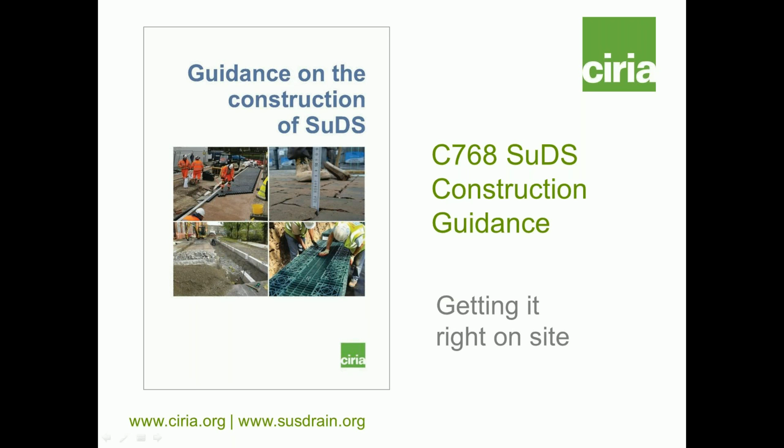Afternoon, everyone. Sue here. What we're going to do is to run through the rationale for the guidance and its general contents, and then focus on some of the key issues that arose as we were developing the guidance, just to emphasise some of the more important areas, in the hope that you'll get a broad understanding of what the document contains, and then be able to dip into it as you need to actually find what you want in any circumstance.

Or indeed to just give guidance to how the construction side of a project may need to be run. So really just to say in the first instance that what we're seeing now is that SuDS really are happening everywhere. Recent research has shown that an element of SuDS is actually occurring in about 80% of all planning applications. So we are really seeing an awful lot of it. And of course, there's an awful lot of extensions, redevelopment and retrofitting happening as well. So this is very much of the moment.

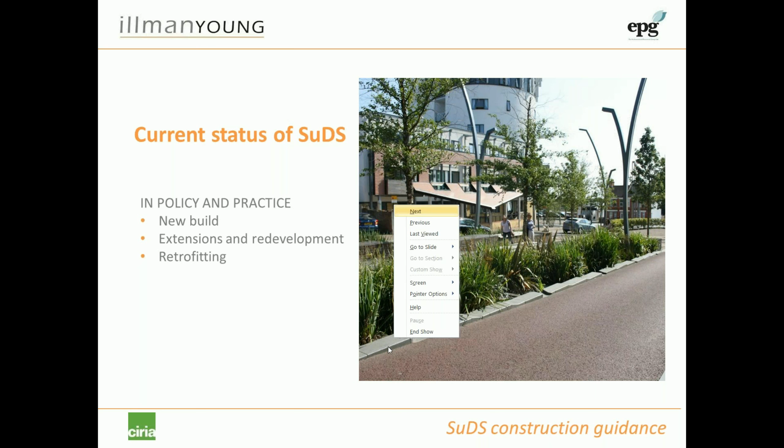Just sorting out our technology here. Okay.

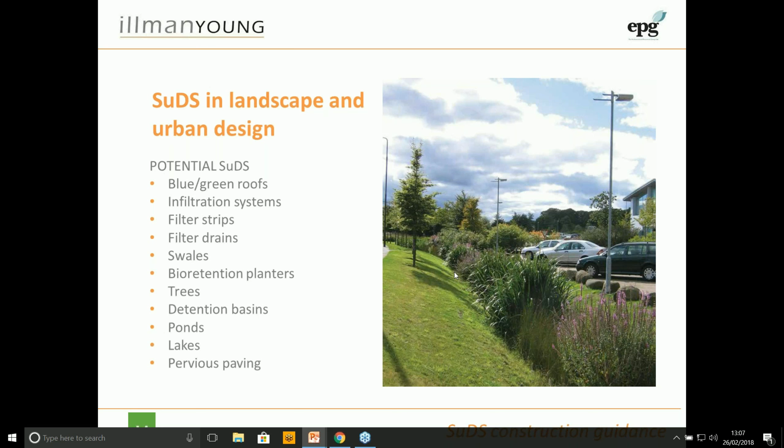So really just to say that the potential for SuDS is everywhere. Hopefully you've all seen the SuDS manual and understand the scope of the components that you can use. These ones are the ones that we're going to use most commonly within landscape and urban design. But of course, there's also the hard SuDS as well, with the rainwater harvesting and the various below ground systems that we need. So the comprehensive range of SuDS is really what's addressed in the construction guidance.

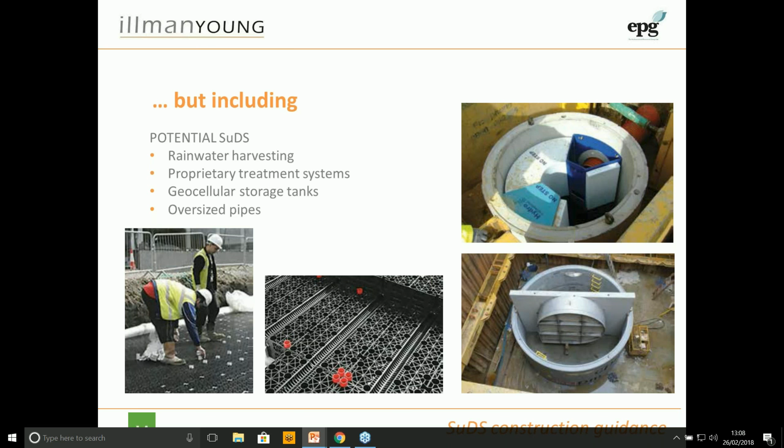And of course, they come in all shapes and sizes and the scale of what we're doing, that we need to be able to adapt how we design and how we construct to actually work for any size of scheme anywhere. And that generates, of necessity, some of the problems that arise in construction.

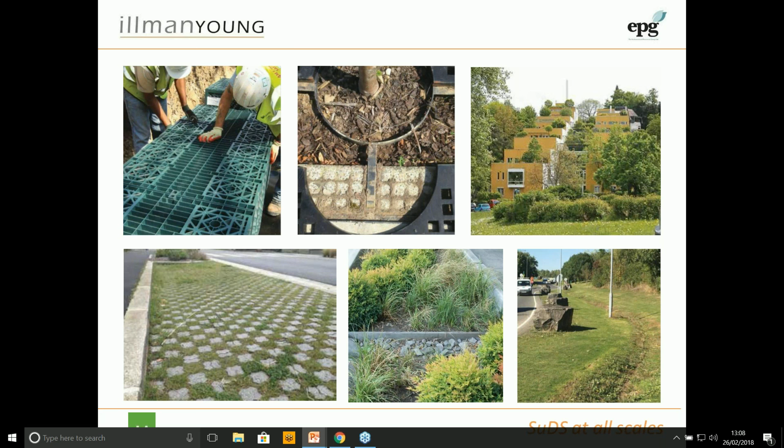So when we started this project, we really wanted to understand, by sending a questionnaire out to the industry, what were the problems that were generally arising in building SuDS, and therefore what did we need to write to actually help solve those problems. That message came back loud and clear in terms of where people saw the main problems lying.

And those were perhaps inevitably about level changes happening on site that had not been anticipated, the fact that when the concept scheme was designed, cut and fill across the site hadn't been properly addressed.

And particularly when looking at retrofitting, conflicts with services really arose on most projects. At the same time, there was a range of problems that commonly arose as well, such as inadequacies in the design drawings that hadn't addressed the whole of the design comprehensively, and existing site information that hadn't been recorded properly and should have informed the SuDS design process.

This gave circumstances that needed to be addressed during construction. Throughout the contract, additional hard surfaces may be required, needing additional design details to integrate them within the scheme, where changes of materials occurred that could impact how the scheme functioned, or changes on site, poor construction, or inadvertent changes where the impact on the SuDS scheme wasn't considered.

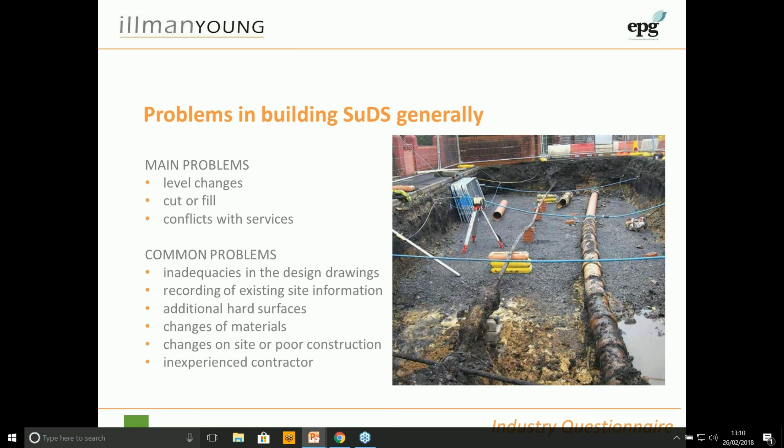Quite often these days, many more contractors are building SuDS, and all of them are inexperienced when they start, so there's a very steep learning curve for those contractors to really get to grips with the problems that could arise on site.

Other problems we asked about - it was interesting that conflicts with areas of ecological importance or with tree root protection zones didn't seem to be much of a problem. I think because generally people have to address those during construction on any site, so there was no particular concern over that when building SuDS.

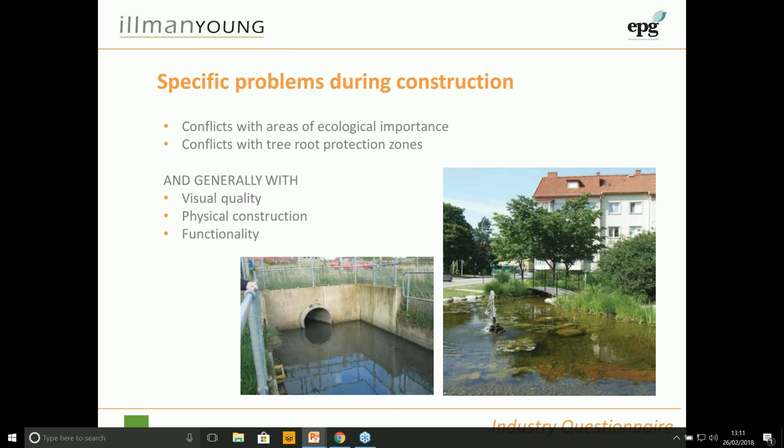But in summary, generally the issues that arose were very much around the visual quality, the physical construction, and the functionality of the scheme to make sure it would work properly on the ground.

Hi, it's Steve here now. So some of the other issues that arose were constructing SuDS on difficult sites, which is also picked up in the SuDS manual in terms of design for these conditions as well.

Issues that can cause construction problems on site are groundwater and the presence of SuDS in groundwater source protection areas, unstable fill materials, contaminated land and how you address construction in those conditions, constructing SuDS on steep slopes, and the converse of that, constructing SuDS on flat sites.

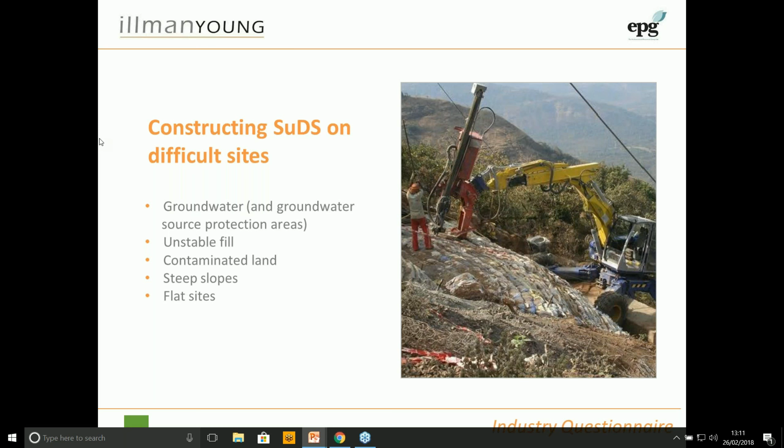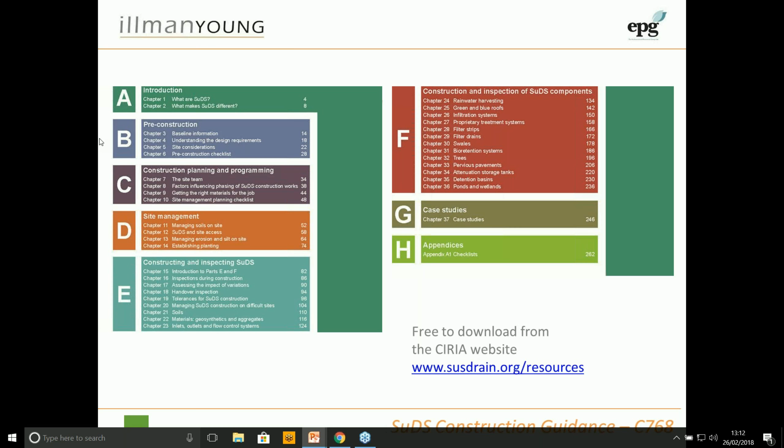So that brings us to the contents of the overall document. It looks fairly lengthy, but as you'll see if you've dipped into it, each of these chapters is really quite small, because when we were developing the system, the whole point was to make it very simple, very straightforward, and written in simple English that anybody could understand, and to make it as accessible to people as possible.

From that point of view, one of the things you'll find in every chapter is a thing called a jargon buster. That is to explain any technical language we really couldn't avoid using, and we've tried to make it an absolute minimum, so you can pick up the book, open it at any point, and hopefully understand what's written, because any jargon in that chapter will be fully explained to you in as simple a way as possible.

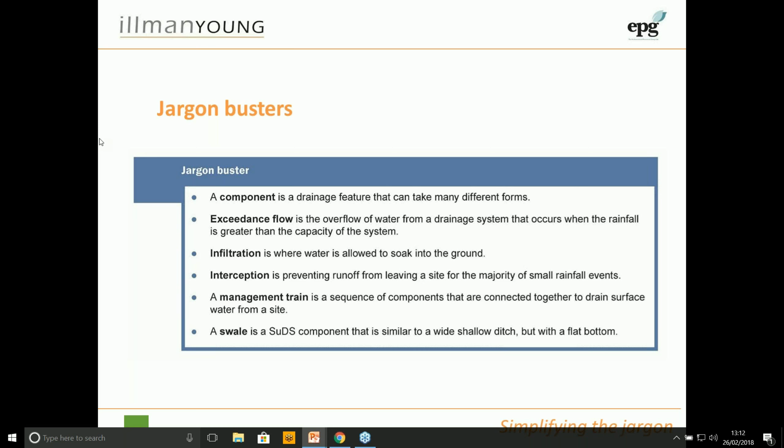We've also included, because this was compiled with a lot of help from industry as a whole, a series of things called handy hints, watch points and hold points. This is where people have shared their knowledge and experience with us in building SuDS, and we've tried to identify these things to assist you in your journey in learning how to do SuDS construction.

So a handy hint is something we've learnt along the way that is hopefully a helpful tip that may apply to your project and worth considering. A watch point is obviously something you just need to be aware of, because a problem could arise.

Watch out to see what the implications of it are and consider that in your project. And then hold points, perhaps a bit more of a stronger point here. This is something that you really need to wait for, to inspect the works and check before moving to the next stage. You can see the graphic approach we've taken to try and make it a little bit fun.

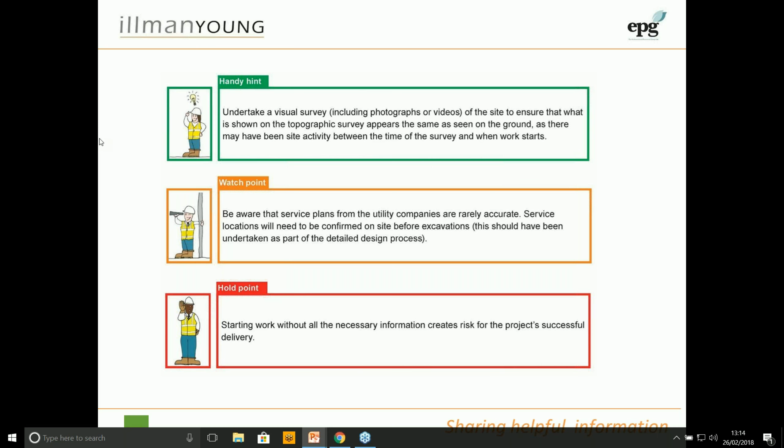But also to have a serious purpose of communicating the issues that can arise on site. As part of that, with the work that we did with the project steering group in developing the guidance, we actually took a lot of case studies from people.

These are two different sorts: mini case studies throughout the document, which deal with a very specific issue that happened on a particular site, and then at the end, major case studies - just 5 of those - that look at the scheme comprehensively and the issues that arose. The important thing with these case studies is to understand what the challenges were, what the outcome was, and what was learned.

I do like this one example. What you're looking at here is some granite setts that have been installed, where the contractor inadvertently misunderstood - this is his interpretation of an outfall, which was supposed to be a gabion filled with stone that would allow water to filter through. Clearly, as you can see, not much water would filter through that. So again, a very willing contractor doing his best, completely misunderstanding, and therefore the need to change that.

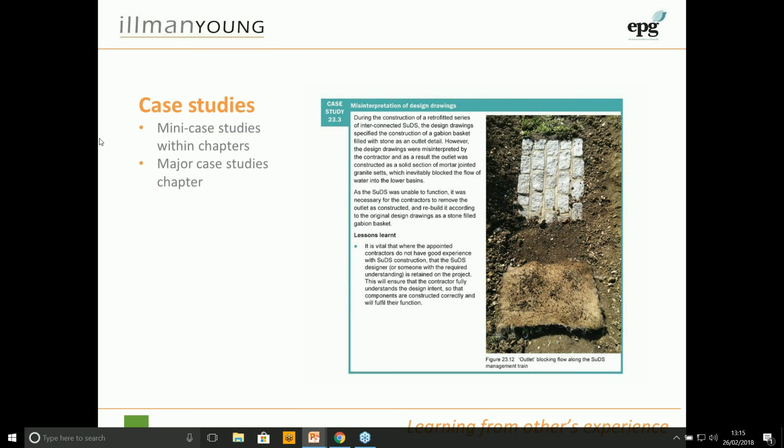This is perhaps not atypical of some of the problems that can arise on site. This is really just to point out that what we're doing here in construction is hopefully, in terms of working with the SuDS principles, trying to deliver some equality between quality, quantity, amenity and biodiversity.

But the point of SuDS construction is that if we don't construct it properly, we're going to cause ourselves many problems in actually trying to deliver those SuDS principles, because so much of what we're wanting to do is based around maintaining the soil structure, maintaining its infiltration capacity, and preventing damage to the site through compaction, erosion and pollution, and the silts or sediments that would arise during a construction contract. And the need to understand that there is such a difficulty in reinstating damaged soils, as well as the need to actually maintain existing vegetation and ecology.

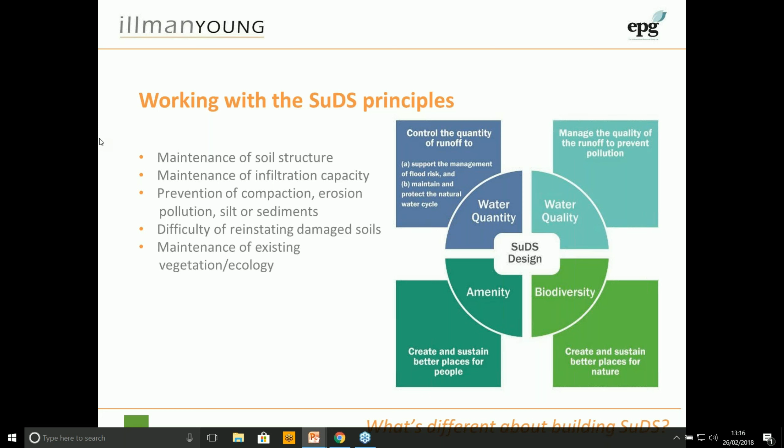Okay, so then really, what's different about building SuDS and how do we get it right? You'll notice in the document what we're talking about a lot of the time is how to get it right and to prevent things going wrong. This is really just a summary of how the document works.

So it's about being properly prepared before starting - that's both in terms of the site and the scheme. Planning the works to make sure you can get it right, planning to avoid the potential site problems that are likely to arise or frequently arise on site, and then how we manage the site and the works themselves during construction. Then at the end, we'll look at the typical challenges that arise for a few of the specific SuDS components.

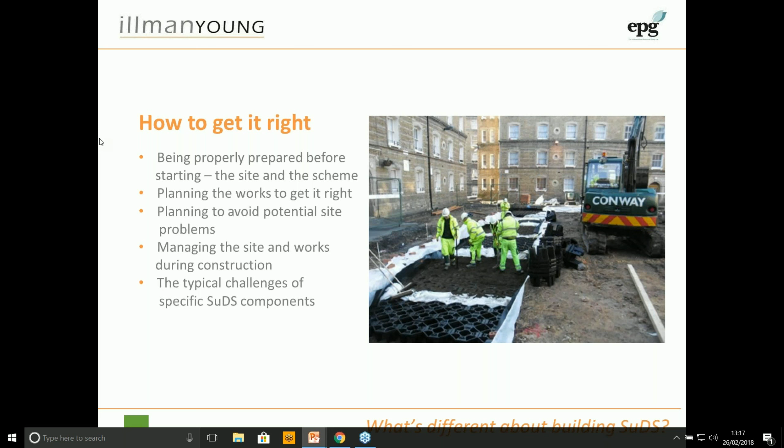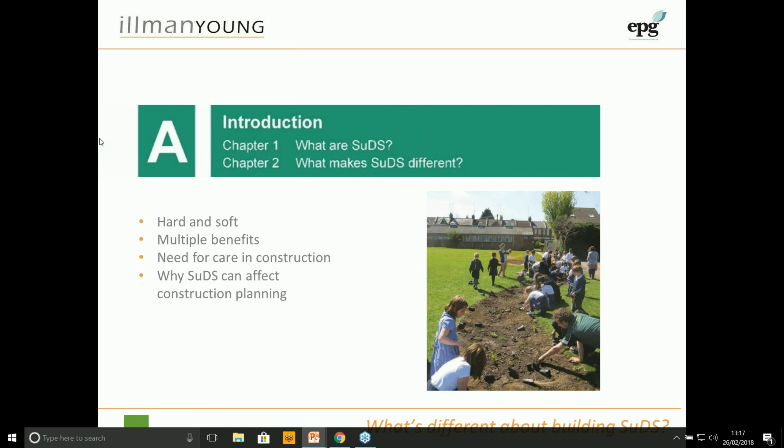Just starting with the first chapter, it's really just an introduction, talking about what are SuDS and what makes SuDS different, really stressing the difference between traditional systems and SuDS systems, and the need for care in construction, and why SuDS can actually affect the construction planning process.

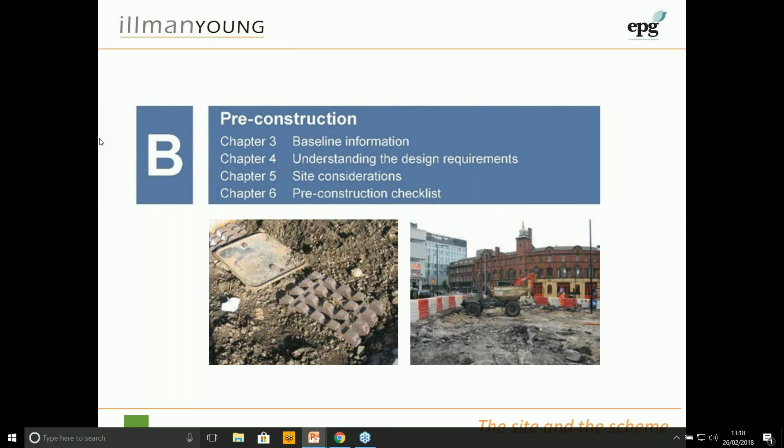In these initial sections, the pre-construction section, what we're looking at is the baseline information that a contractor needs to be provided with, how the contractor needs to understand the design requirements, because a lot of problems that have occurred really occur as a result of a lack of understanding of what the SuDS are trying to achieve, and then specific site considerations and a pre-construction checklist.

So it's checking how the design works, and also the specific specification requirements, because quite often we're using materials that may have the same name as normal materials, for example a sub-base in a permeable pavement, but the properties and specification requirements are different to what would be normally required.

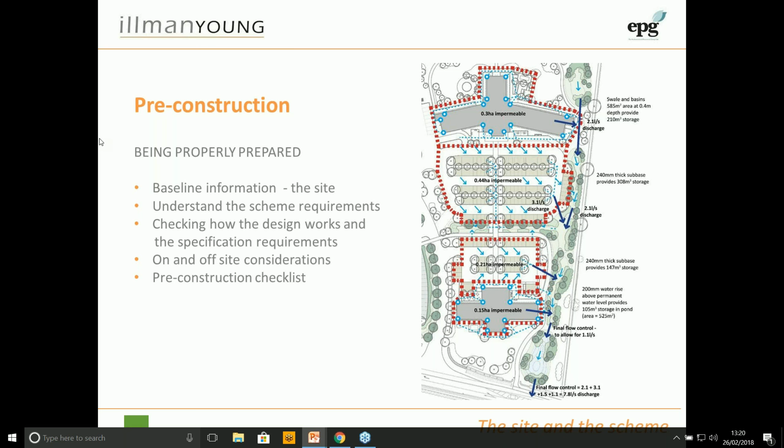There are also on and off-site considerations, so you need to understand the impact of construction off-site, and at the end of this section there's a checklist for contractors to use. It's there in a form that you can adapt to your own specific requirements.

So, construction planning and programming. In Chapter 7 there's a description of the site team. Chapter 8 covers factors influencing the phasing of SuDS construction works, and getting the right materials for the job, which I've said already is really important. Again, there's a checklist at the end of it.

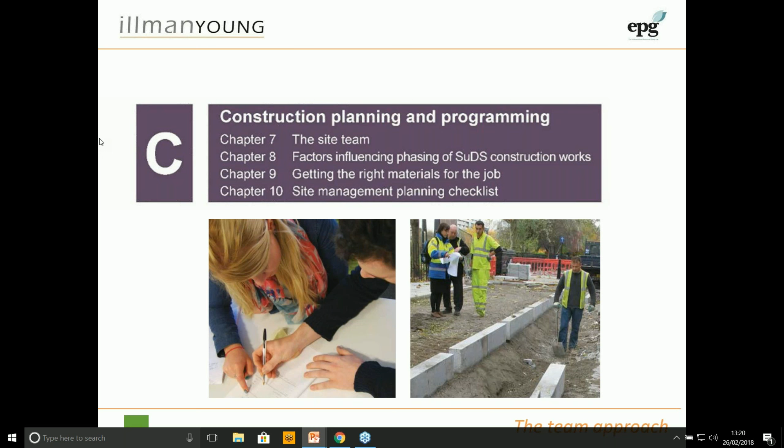Construction planning and programming - this is the key to any good construction. It's not just SuDS, this applies to anything, so people should be familiar with a lot of this process. There's the site team and how they behave.

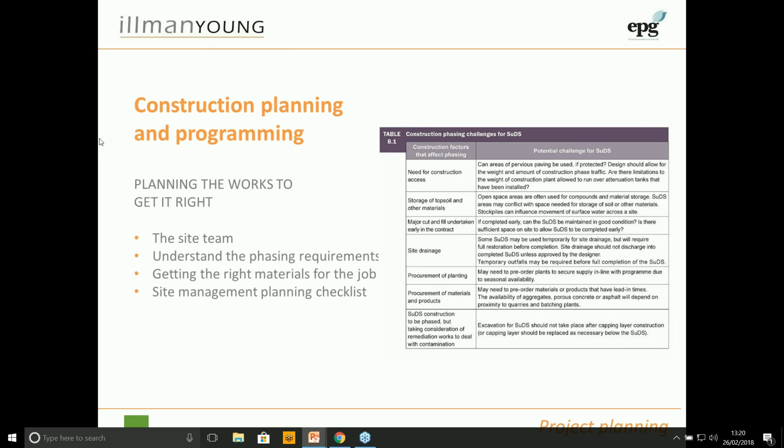For SuDS they need to be involved - the drainage designer, the SuDS designer, really needs to be involved in the process of the development layout from the start, because it does make it easier to construct the SuDS that have been designed.

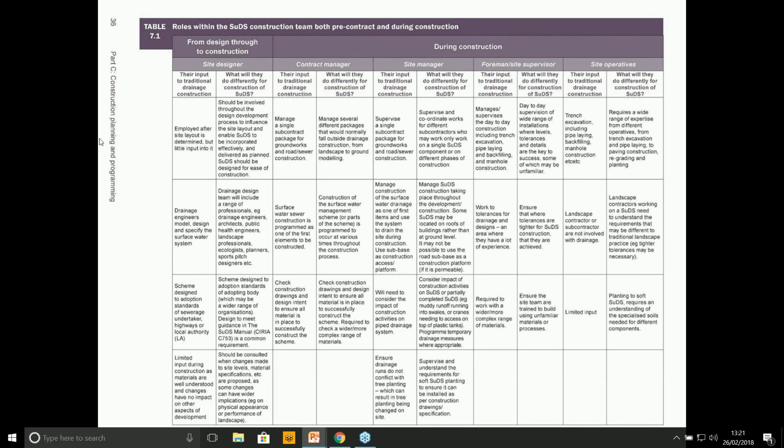You also have to think about the phasing and some of the issues that site managers have to deal with that will impact on how the SuDS is used during construction, and how the phasing of the SuDS construction can be influenced by other factors that have nothing to do with, that are outside, the SuDS design in effect.

So this example we've put in here was a site I was working on for the remediation of a contaminated site. I realised it had quite a lot of SuDS in the open space, so I sat down with the site manager and we went through some of the things he'd got to think about that impacted on the construction of the SuDS.

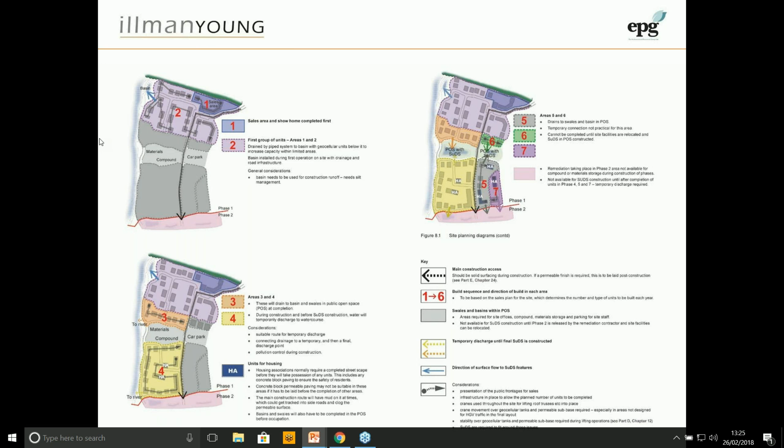So there are other things explained there, but that is, as I said, from an actual site and a discussion with the site manager.

Again, those are factors to be considered when you're looking at variations or substituting products. This is quite important either in permeable pavements where you've got geomembranes or geocellular units, plastic tanks, because they all have different properties. It's important to understand that if you are changing from specified products, it shouldn't influence the design performance of the SuDS. So if there are any substitutions of products, the contractor needs to refer back to the designer to make sure the performance is not going to be affected.

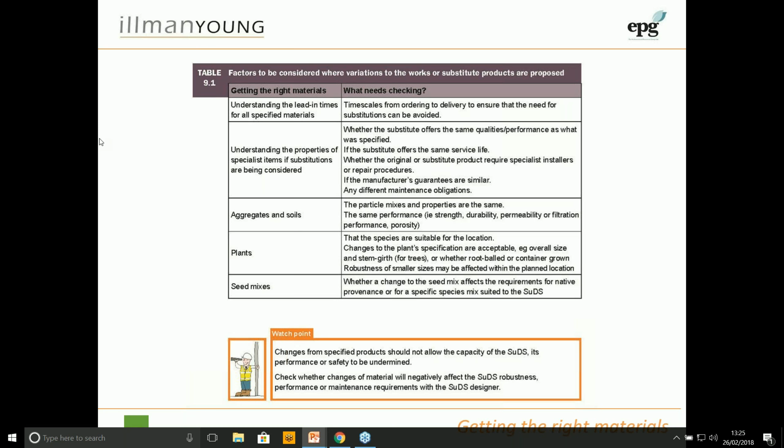Okay, so we're going to now look at site management. That's very much talking about managing the soils on site, SuDS and the site access, the issues around erosion and silt, and establishing planting.

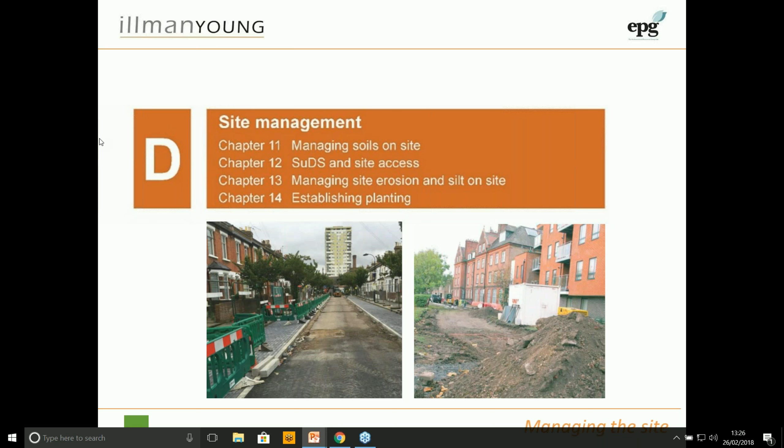So managing the site, so avoiding what can go wrong. This is very much the approach that we're talking about, getting it right to avoid what can go wrong. So managing soils, SuDS and site access, erosion and silt, and establishing planting.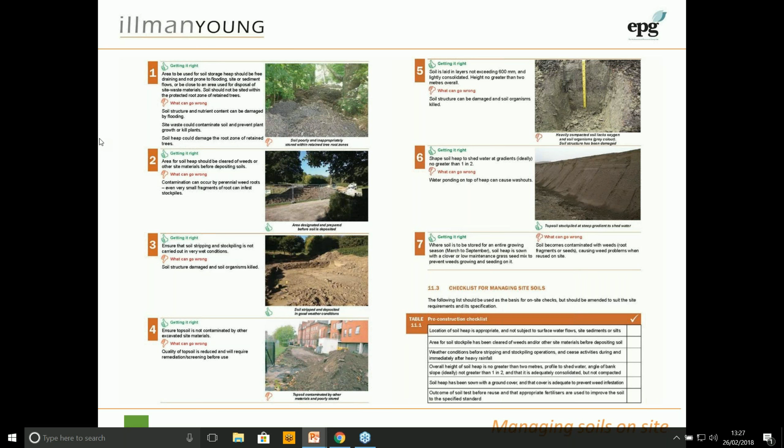One of the main issues that we come across quite commonly is using permeable pavements and the need to use roads as a construction access. Obviously the open graded aggregate that we use as a sub-base in the permeable pavements is easily clogged by mud and debris from construction traffic, but it is normal to construct the sub-base for roads and then use it as the site access. There are various ways that we've seen used on site to address this issue so that the sub-base can be used as the access.

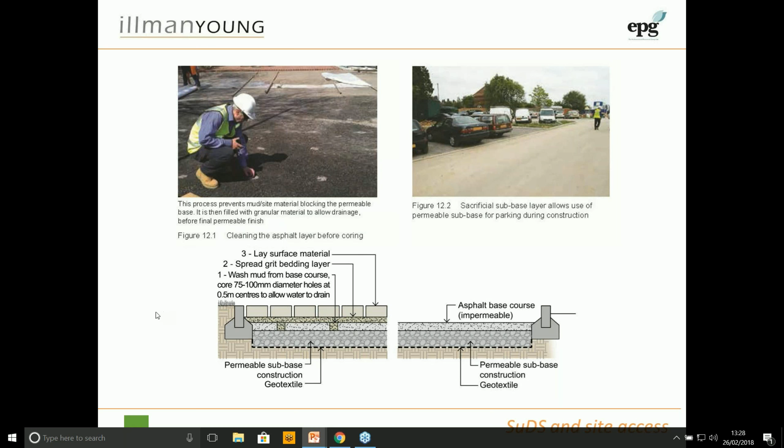For example, on the top left-hand side, a very common approach is to lay the sub-base and then put a layer of impermeable asphalt, or DBM, over the top of it and use that as the construction access. Then at the end of construction, the very last operation is to clean that off so that you've got nice clean asphalt, core through it. I think normally it's 0.5 metre centres, 75mm diameter holes, fill those with free draining gravel, and then construct the block paving surface, the permeable block paving, on top of it.

But others use sacrificial layers of type 1 sub-base that are separated from the main sub-base by a geotextile, and then strip that off at the end, and that's shown there. There are other examples shown within the document of how you can manage that issue.

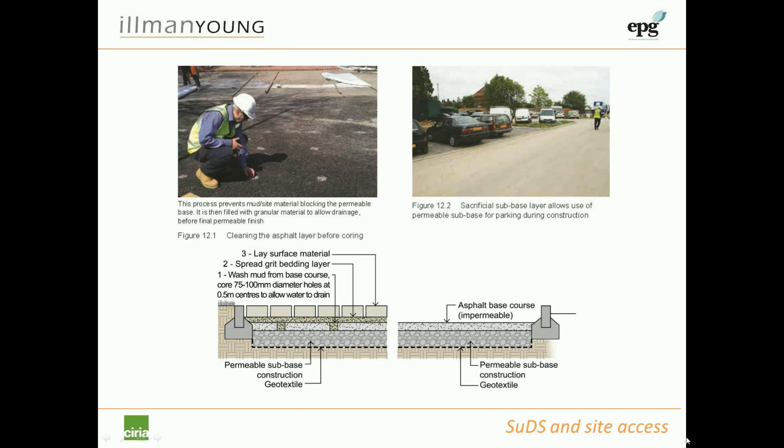Okay, then managing silt and erosion. Clearly this is one of the problems that occurs very frequently on sites, and this is very much also part of the planning process, to consider what you're doing, knowing these things are going to arise, that you are going to have silt and erosion problems on site. Sometimes actually doing the excavations for things like swales is a very effective way of managing those problems on site. The key is understanding that in due course those will all need to be fully remediated before they can actually be constructed in their proper final form.

Some of the problems we see are where things like swales are actually constructed and finished and then allowed to be used, or inadvertently collecting silts and sediments, and that's when the problems of remediation really occur. Also think in terms of planning, times of year - if you need your ground established in terms of grass cover to prevent runoff, you can't sow grass seed in the middle of winter and expect it to grow sufficiently to be effective. So again, plan your works to manage a problem you know will happen, and it may be that you have to turf some of these areas to enable that management.

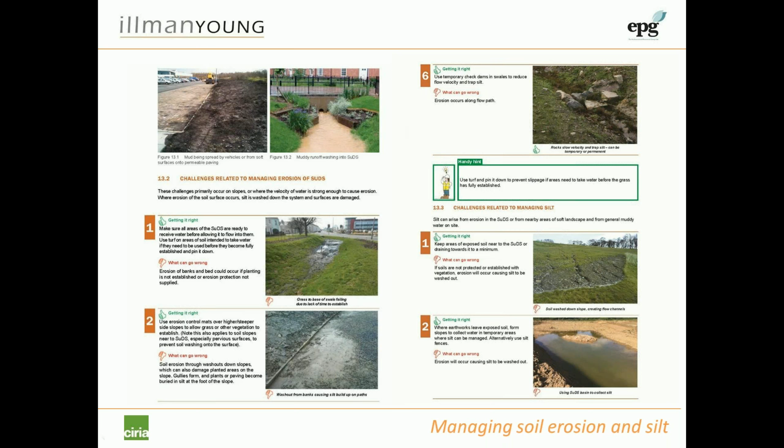And then establishing planting, really understanding why you should plant early and what plants and grass contribute. That is mainly to do with the prevention of silt and erosion, and the fact that if you want to put water into a system, you have to have your planting or your grass well established before you can allow water to run through it.

So that means you do need to consider the time of year, or if, when you get there, you've dug your swale and you need to put water into it quite quickly and you can't wait for the grass seed to establish, then the tip is always to turf the base and partially up the sides of your swale so that you can enable it to root down much more quickly, and you can pin that down so that it's not eroded by water.

If you were looking for a wildflower meadow grass along the sides, it doesn't particularly matter if you have turfed the bottom and partially up the sides, because if you seed the upper part of your swale, in due course you will get colonisation into the base on the basis that the plants themselves become established in the environment that suits them best. So the fact that you might not have got exactly what you wanted day one doesn't mean that won't develop over time.

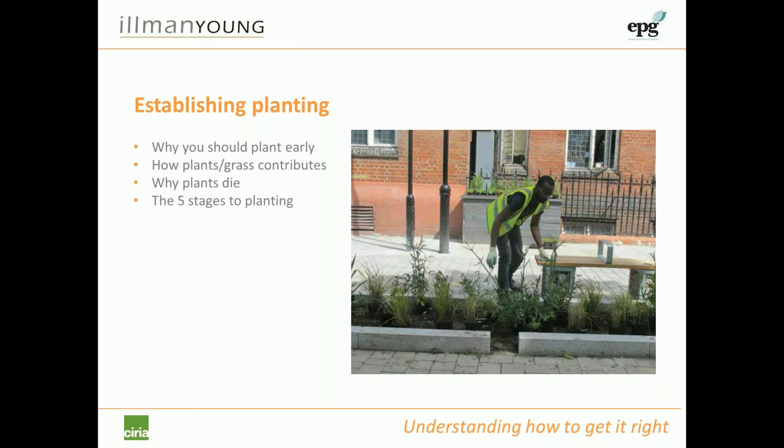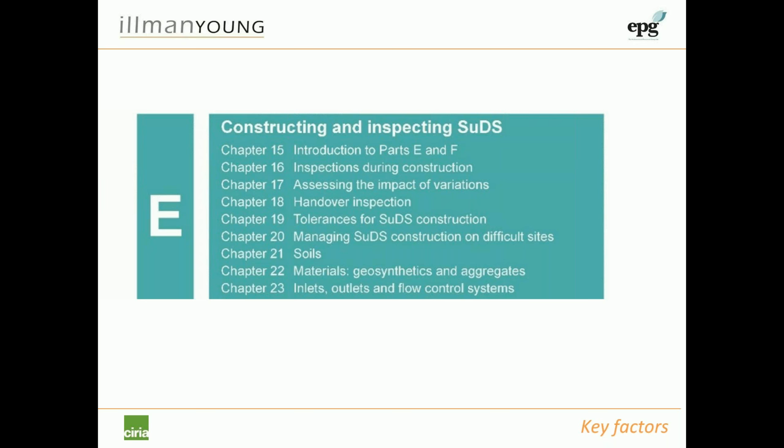So, Section E is about constructing and inspecting SuDS, and you can see there the list of items that it covers. We've already talked about assessing the impact of variations.

If you do end up with increases in hard surface areas, are the new areas pervious or impervious, and does that affect the downstream components and whether they've got sufficient capacity?

Changes in levels is particularly important because in normal construction, particularly for landscaped areas, there's probably a much greater tolerance for variation in levels than there may be with SuDS. Because even along the swale, even a small drop below the design levels can result in water flowing where it's not intended.

We've talked about substitution of proprietary products. Will they perform to the same standard? But the same also applies to plants and seed mixtures as well, which are very important.

And value engineering, a very much misused word. In the UK, value engineering is not what it was intended to be, the way it's applied mostly. In the UK, it actually ends up being get the cheapest thing possible. Value engineering and value is actually looking at the benefits and costs. So if you value engineer something, you should actually be getting better performance as well as a reduced cost.

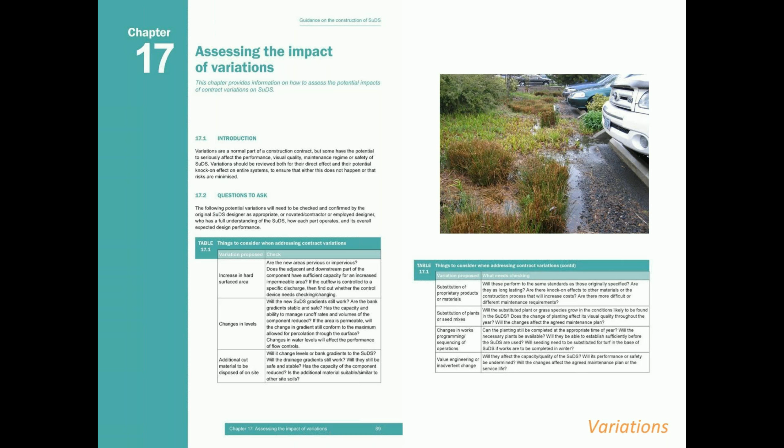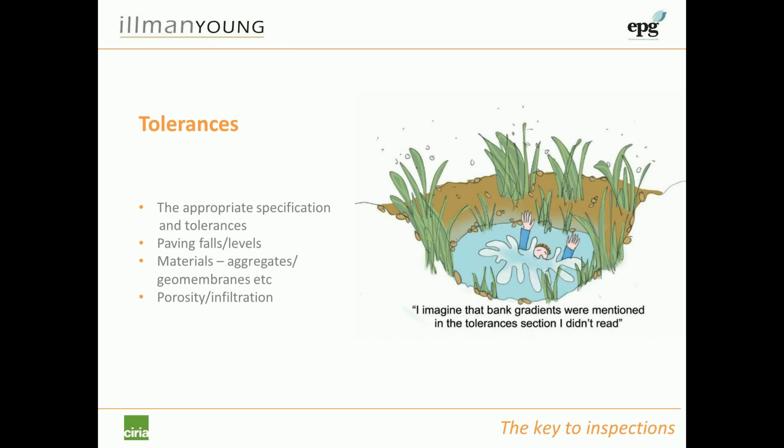So again, an example from the document is for surfaces, for permeable surfaces, in British Standard, and I think this is from Interpave guidance, but there are standard tolerances that we work to for normal block paving that we can start to use and adapt for permeable paving. And you can see there on the left hand side some suggested tolerances for pervious surfaces.

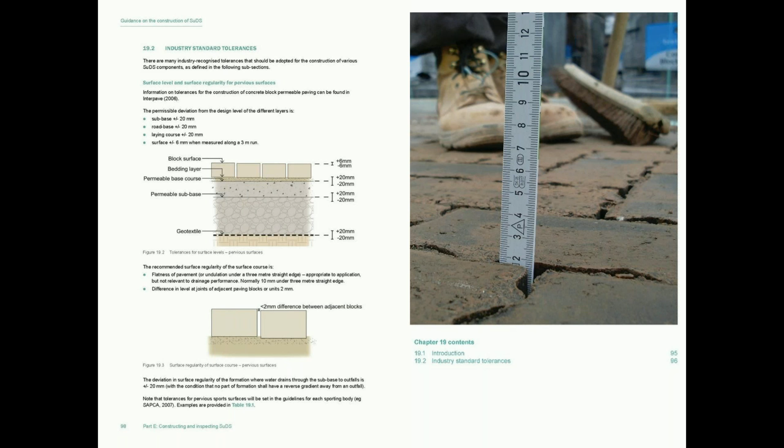We then go on to look at construction in difficult sites, and an example here is high groundwater. Again, you need the forward planning to manage the groundwater using an appropriate scheme and manage water flows into the excavations. Both these examples relate to controlling groundwater where we're installing plastic tanks. It is quite important.

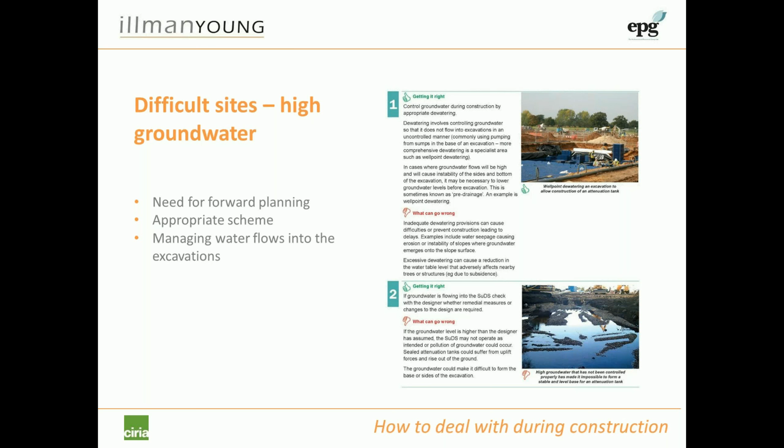I've seen quite a lot of these tanks that are wrapped in membranes float away and move out of position, simply because there's either a very small amount of groundwater in the bottom of the excavation or simply from rainfall that falls down the sides of it.

Difficult sites on contaminated land. There's advice because quite often we're excavating SuDS features either into contaminated soil or potentially through a capping layer. A common way of remediating contaminated land is to provide a clean capping layer of soil over the contaminated material. If that's already been placed in a public open space, for example, we need to maintain the continuity of that when we construct the SuDS through it. Also, we need to take appropriate health and safety precautions if we're digging into contaminated material.

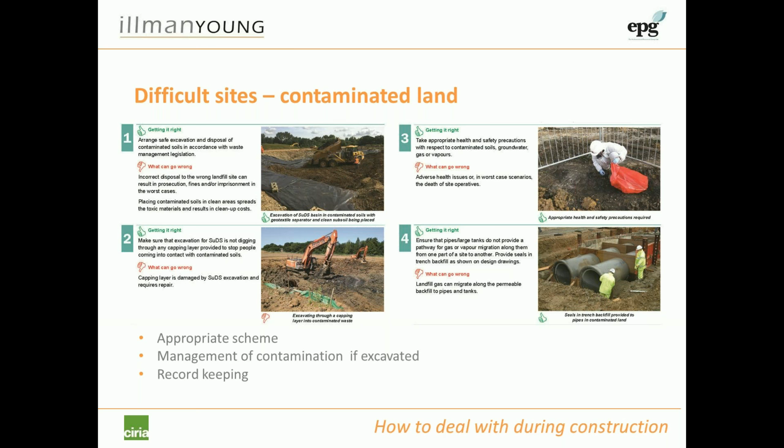Okay, so we're now moving on to soils. This is really important to understand the different types of soils that are likely to be used on a site and for the SuDS and where to use them. In terms of natural soils, there are two types commonly used: natural soils that come within the guidance of the British Standard, which is what you'd use on a site anywhere, and specialist soils under the British Standard, which have a particularly high or low pH. Those are used on specific projects for a particular reason. But generally, we'll be trying to deal with natural soils.

However, we all understand that natural soils are not always available, and therefore on many landscape sites we're dealing with manufactured soils. There's no problem with that, except ideally you would not use manufactured soils within the SuDS, and you would not use them as part of a mix if you're trying to create things like bioretention or filter media. Do use them in the general landscape parts of the project, but avoid using those within the SuDS - try to use natural soils in those.

So bioretention or filter media is a mix, and that can either be mixed off-site or mixed on-site in small quantities. You have to actually get the properties right with that, because the point of that is to actually have something that will drain down within a required time scale. Structural soils are those that can be compacted and therefore will allow you to construct paving over the top of them - that's a very specific requirement.

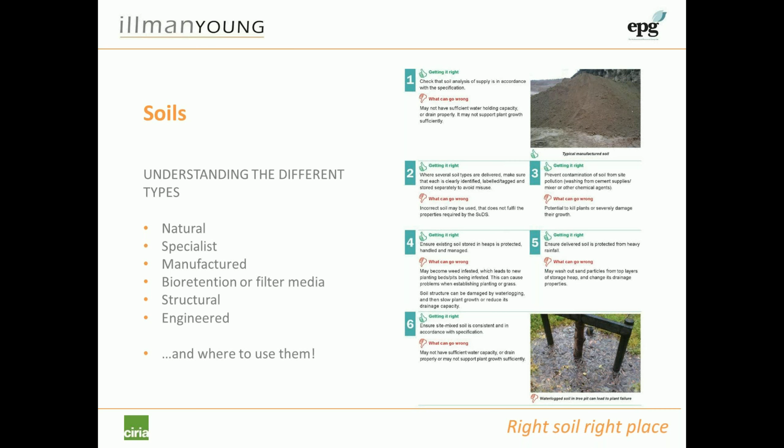And then engineered soils, we're back into gravel and sand mixes with some soils that will have plants growing in them. It's very important that you understand how each of those is going to be produced, where you're going to use them, and if you've got several different types being used on site, that each of those types are kept separate and identified so they're used in the right places. Because if you don't use the right type in the right place, you run the risk of either them not giving you the drainage that you might require, or not allowing the plants to grow properly in the circumstance for which they've been designed.

Another area where we see a lot of problems is with inlets and outlets, and Sue showed you a great example earlier of how it can go drastically wrong. So it's important when we're constructing the inlets and outlets that we use the correct pipe sizes and provide the head walls, weirs and flow controls as shown on the design drawings. The other issue we should see is that visual elements are maintainable and aesthetically pleasing.

Just as an example, on the right hand side, the third slide down, the weir and that slot in the brick wall at the top is a flow control for the SuDS. It should have actually had a stainless steel plate in there with a design V-notch weir in it, which was omitted by the contractor.

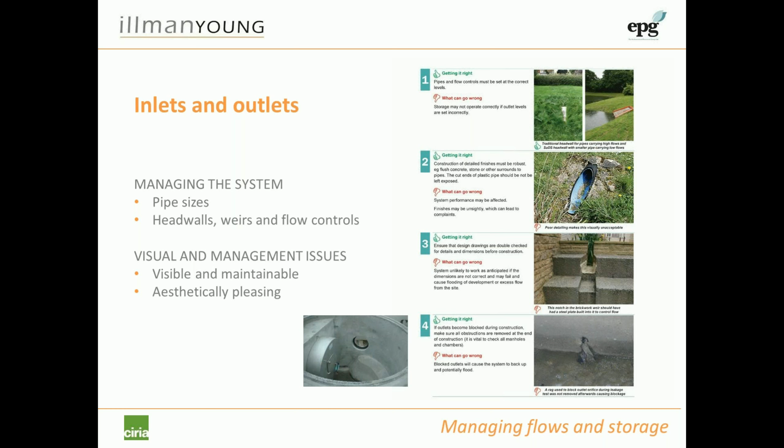With geosynthetics and aggregates - geomembranes, geotextiles, geocellular confinement, etc. - it's important that the contractor understands exactly what needs to be used in which place and that they're installed correctly. For aggregates in particular, where we're using them in SuDS, they're normally used to store water and allow it to flow through them easily. So they're generally open graded - they don't have fines in them, particularly sub-bases.

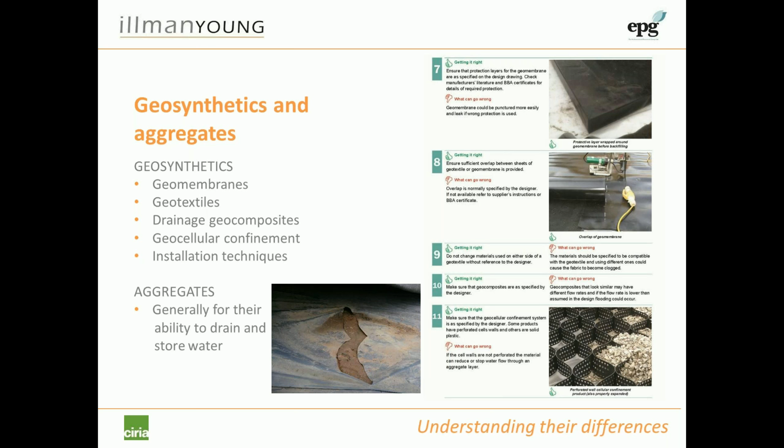The sub-base we use is quite different to type 1 sub-base, and you can see that in the picture on the bottom right-hand corner. For geomembranes, you should really be using specialist installers who can do the required welding, which you can see in the second picture down.

Okay, so that then brings us really to the section which is all about the different SuDS components and the issues that are likely to arise when you're constructing each of these. We've just picked out a few of these to talk through, some of the more popular ones, to give you a flavour for the way it's approached in the document.

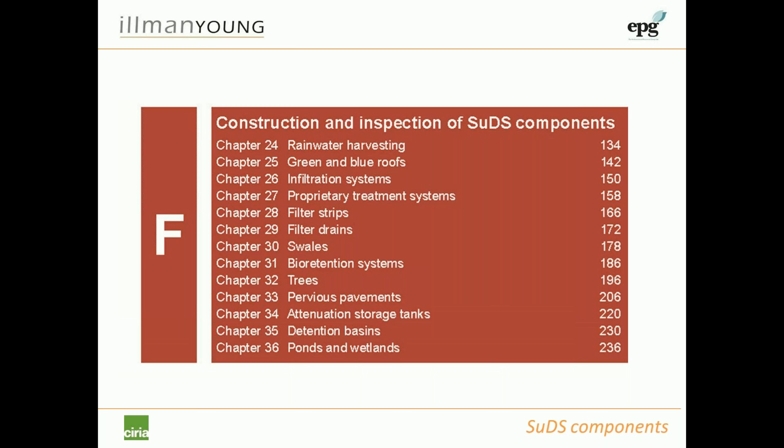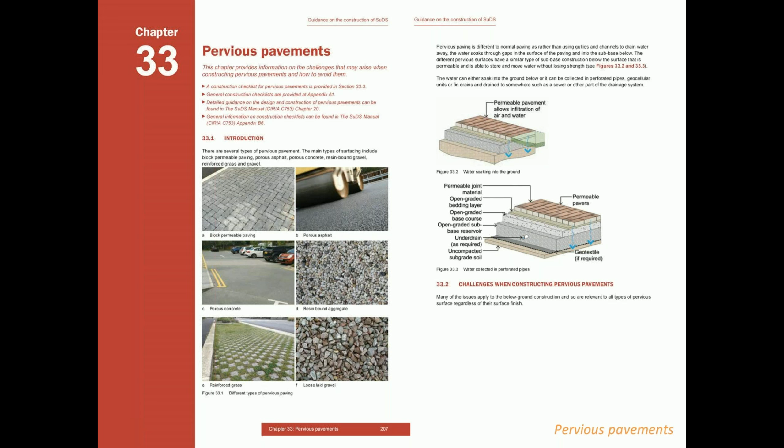So again, for permeable pavements, there are different types of surfacing which we've identified. You can have reinforced grass, loose gravel, porous asphalt, as well as the commonly known permeable block paving. We've talked about using it as an access route during construction and coring it.

And the question was, can't the permeable paving for the housing association be the last phase of the construction process? It can be, and that's ideally what would happen. The problem is that the housing association will not accept ownership of the houses and will not allow people to move into them until the permeable paving is constructed. So what that could mean is that the houses are there and completed, but they can't have people living in them for 6 months until the site's finished. And obviously the developer wants the housing association to take them over and have people living in them, because that's maintaining his cash flow. So that's the reason why it's not appropriate in those situations.

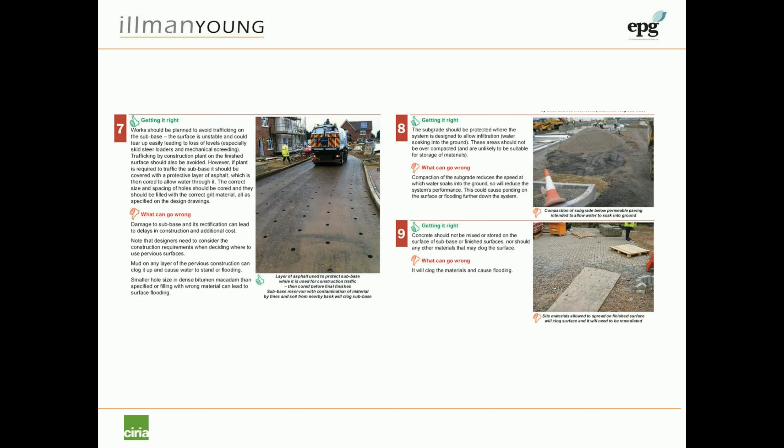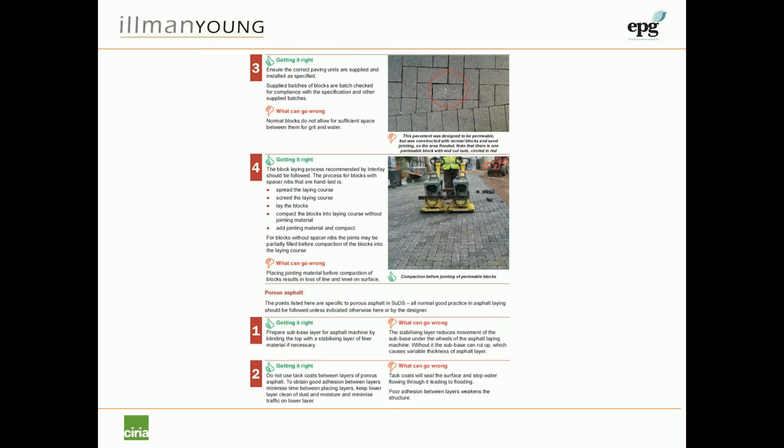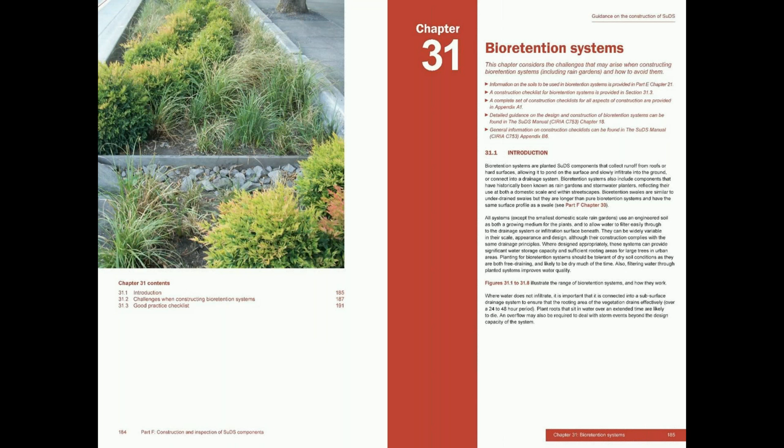Okay, so bioretention systems. I think this is a really good chapter to get to grips with. First of all, what we've done is to actually explain the different types of bioretention systems, because the joy of bioretention systems is that they can be used in so many different ways, both in terms of new build and in terms of retrofitting. But the principles of their construction is pretty much similar throughout.

Probably the main difference being that if you're disconnecting a downpipe on a retrofit scheme, then you're probably reconnecting it into the existing drainage system further down the line, whereas if you're constructing a new bioretention system, then you're just going to be connecting it into the main drainage system. Bearing in mind that obviously if you've got good infiltration, then you may not need those connections, but in the main we're looking at attenuation storage, so we are connecting into a drainage system at the end.

I think this is something that people find slightly difficult to understand, because when you're looking at some of these systems, and particularly something that looks essentially like a planted swale, it looks like it's a completely natural system, but in fact we've got all the filter media and we've got all the drainage happening underneath it. It's just not evident on the ground.

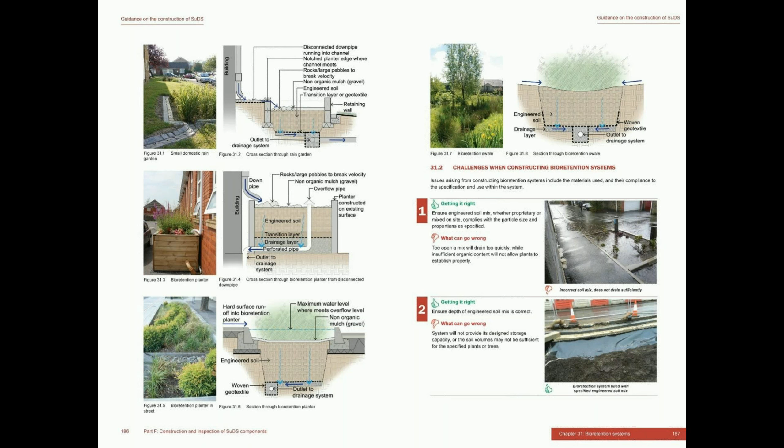And then again, looking at different sorts of issues arising whilst you're building these systems. So ensuring that you've got the right materials, the right build-up from the base all the way through to the top, setting the levels right for where you've got your weir walls to manage the flows down through the site, having systems in place that allow the scheme to overtop and drain down in the event of extreme events with that overflow system, having the right plants in the right places to do the job they need, and making sure that where you're using bioretention systems in highways, you've got properly designed systems in place to enable the water to flow through into your bioretention planter in the first place.

So getting those details and levels right to get the flows through into the system, and then hopefully you will have your silt traps in there to stop the system getting clogged. All of those details, which are really quite small in combination, are all important to ensure that the system will work properly once it's installed.

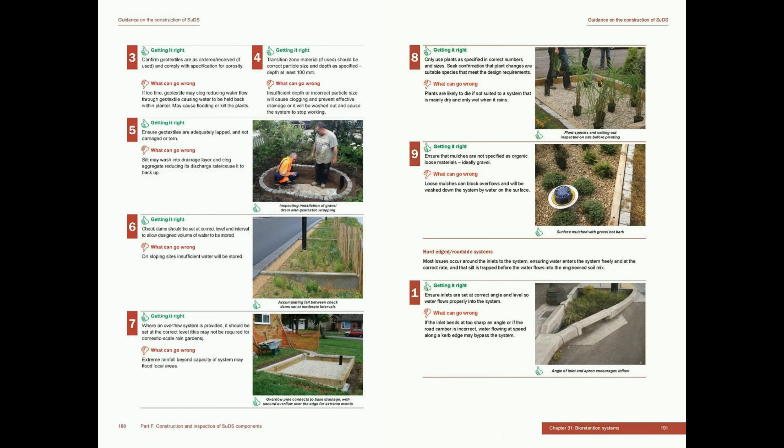In this instance, without going into the details, one of these mini case studies here on bioretention systems shows that the soil in the bioretention system is actually higher than where the water's coming in from the inlet in the street. So that was an error there. It was all put in far too high, so the water just collected around the inlet, and the whole lot had to be taken out and redone. The reason is that normal landscaping areas tend to be higher than the surrounding paved areas, so the contractor had just done what he would normally do without understanding the SuDS construction aspect.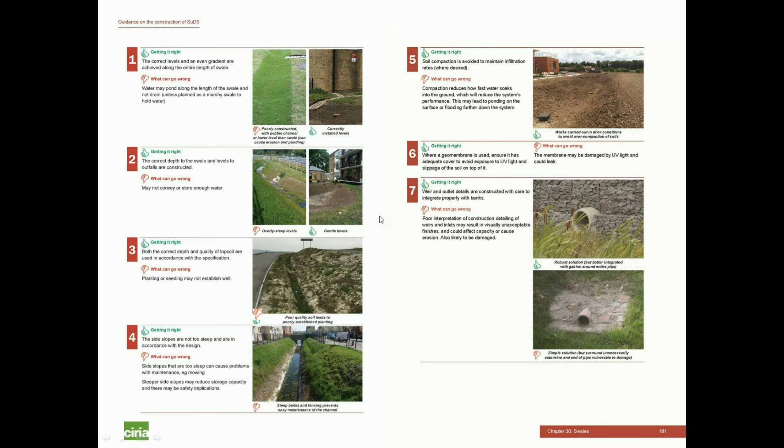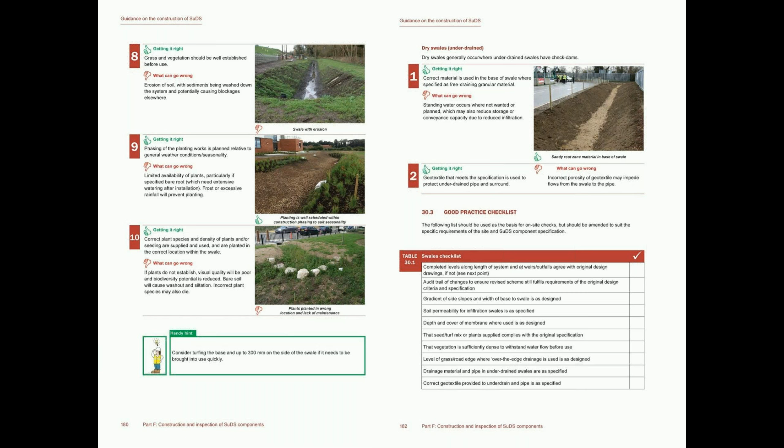You can see there, again, an example on the top right-hand side. There's a sandy root zone in the bottom of the swale, which is there to allow some additional infiltration and filtration from a water quality perspective, and there's an underdrain underneath that. But it's important that the contractor understands that material is different to the topsoil he's putting on the sides of the swale - the sandy root zone in the bottom needs to be free draining. If he used the normal clay topsoil that he's put on the sides, the swale wouldn't perform in the way the design intended.

Okay, so now moving on to trees, because obviously in the urban environment, this is one of the key areas where we can make a contribution, where other SuDS may not be acceptable. I think one of the important things to do - because this whole issue of constructing trees in the urban environment with SuDS is quite tricky to understand and also to get everybody to engage with - was to really try and pull out the key ways that you can actually construct trees with SuDS in the urban environment.

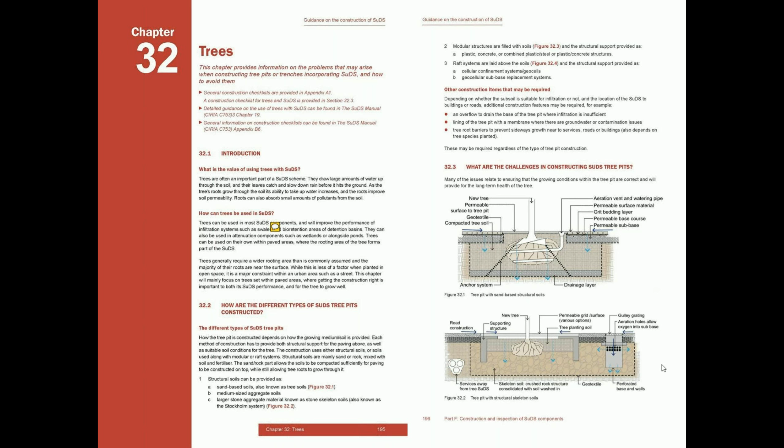I'll start with Steve. So just to repeat, is it possible to maintain permeable paving to maintain its functionality? The answer is yes. There must be at least 50 technically reviewed papers that demonstrate you can keep permeable paving working indefinitely. It clogs at the surface, so when silt washes into it, it accumulates in the top 30 millimetres of the joints between the blocks, and we know we can rehabilitate it using road sweepers. There are even specialist small companies in Scotland now that have cropped up, that go around with a transit van and a small handheld cleaner they can use on permeable pavements. So it doesn't have - it's got an infinite lifespan in terms of drainage performance.

The other one: where can I download the SuDS guidance? There's a very good website called SuSdrain.org - www.susdrain.org - which is the Ciria website for sustainable drainage. There's a link on there to the SuDS construction guidance and the SuDS manual, and an awful lot of other invaluable information about SuDS design, construction, etc.

And then there's a final one from Amanda McDermott, who asks: has been advised that geotextiles eventually silt up and are unnecessary - what are your thoughts, please? Again, it depends. If the geotextiles are being used correctly, they shouldn't silt up.

If you're using geotextiles to filter silt out of the runoff, they will eventually clog up. But they shouldn't be used in that way. Normally, they are being used to separate materials and stop a finer material being washed into a coarser material.

The two most common examples of that are where you place them between the laying course for a block paving pavement and the underlying subbase. If the overlying laying course, which is finer, can wash into the voids in the underlying subbase, you can put a geotextile there. But if you specify the grading of those two materials, you can specify them so that they are compatible, and the finer material will not wash into the underlying one. So you can remove the geotextile in that instance, and they're not necessary.

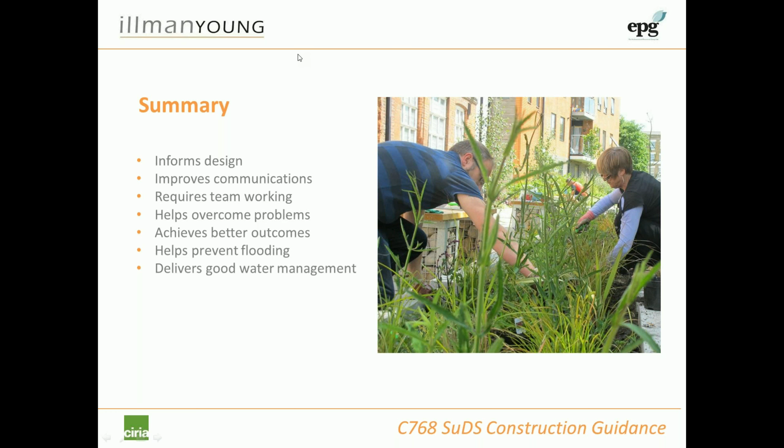Well, big question. That's slightly different to SuDS construction guidance. Yes is the answer in terms of what's currently happening at the moment. There is looking to be a revision to Sewers for Adoption 8, that will provide a pathway for enabling SuDS to be adopted by water companies.

The final draft is being written at the moment, and that will be going out for consultation quite soon. I think there's hope that that will come in on stream as a working document in spring of next year.

I've been involved in that, and that will be doing the rounds of the water companies, but there is a will in the water companies to actually do that as a whole.

It's also quite likely that Ofwat will require water companies to adopt SuDS in due course during the next AMP period. So we are moving in that direction. And water companies are very much interested in ensuring that there is very good quality SuDS.

One of the things that will be key will be ensuring that the SuDS are built as designed, and that when they do adopt them, if and when they do, they are going to ensure that those are fully functional and built as designed. So getting the construction right in that respect will be key to getting them adopted. It's very important, that relationship.